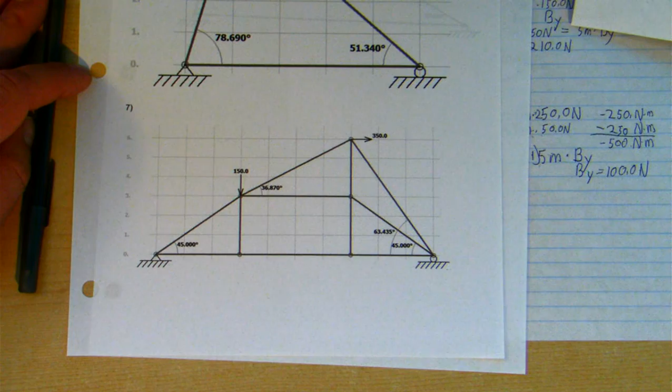All right, this is Monday, January 4th, 2021, Aerospace Engineering, a debrief on the assessment that was taken just before winter break, where one of the challenges was for students to work out the reaction forces for a given truss structure.

This particular problem looks very intimidating, and that was by design. There are some students who even made an attempt to work out what the tension and compression forces were for each member of this truss structure. But that's not what the objective was on this problem.

The objective was determine the reaction forces acting on this thing externally. So here's this complicated structure. I'm pushing down on it at this point with 150 newtons, we'll call it. I'm pushing to the right at this point with a force of 350 newtons.

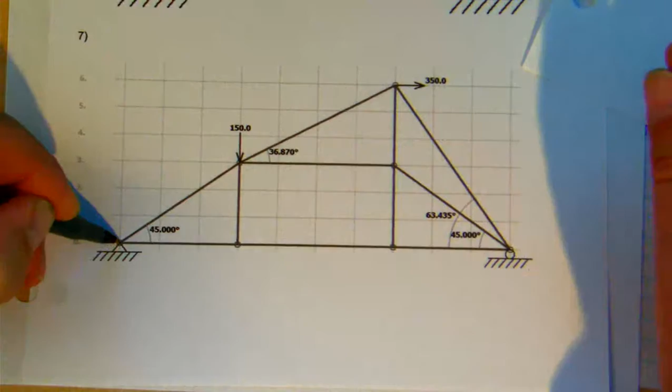And the question becomes, so what pushes and pulls do I need here at what we'll call point A, or over here, we'll call this point B, such that the sum of all the forces horizontally add up to zero, the sum of all the forces vertically add up to zero, and the sum of all the moments or twisting torques about any arbitrary axis of rotation also add up to zero.

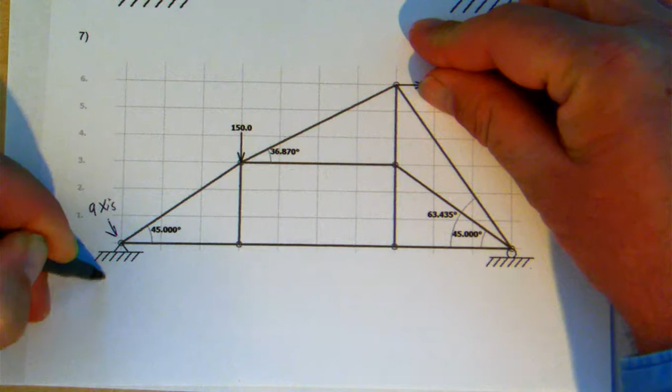Now I'm going to choose to put my axis of rotation on the left corner at point A, but that is an arbitrary choice. You can put the axis of rotation anywhere that's convenient for you. Here we go.

This 150 Newton force is pushing the structure downward. So there must be 150 newtons upward force going on between point A and point B.

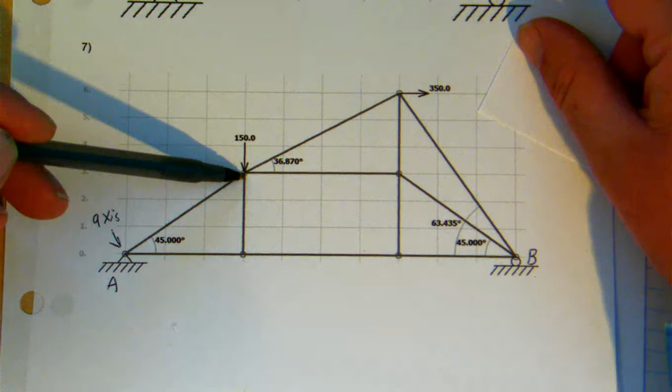But I'm not going to start by doing that. I'm going to start by analyzing the moments, the torques, the twisting forces that are trying to rotate this thing. So I'm interested in this 150 newtons is pushing down at a distance of 3 meters along its line of action from the axis of rotation.

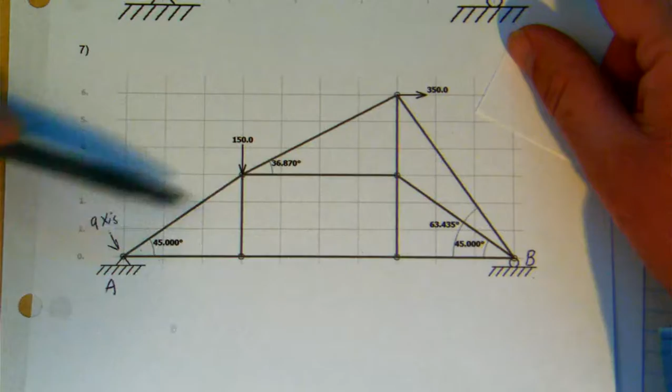So let me say that again, kind of. I chose my axis of rotation to be at point A. This 150 newtons is really, by Pythagorean's theorem, it's 3 squared plus 3 squared is 3 times the square root of 2 meters away from point A. You can do it that way. You could say R is 3 times the square root of 2 meters.

The direction from R to F is taken to be 0 degrees. On this printout, it says, oh, look, here's an angle of 36.870 degrees above the horizontal. That is not the angle that we would use for theta. We would say, I'm going to take the direction the pen is pointing, that's R, and I'm going to call it 0 degrees.

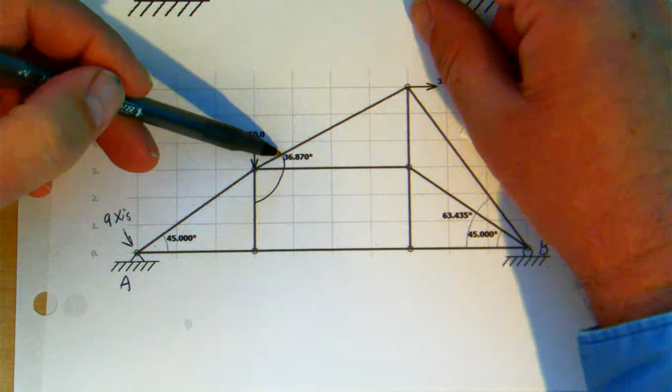The direction that F is pointing is vertically down. What is the angle between the direction of the pen and the direction of my finger? Well, first I rotate it 36.870 degrees, and then I rotate it an additional 90 degrees, and I get my answer. Oh, this angle is 126.870 degrees. And that's what I would have to type into my calculator, right?

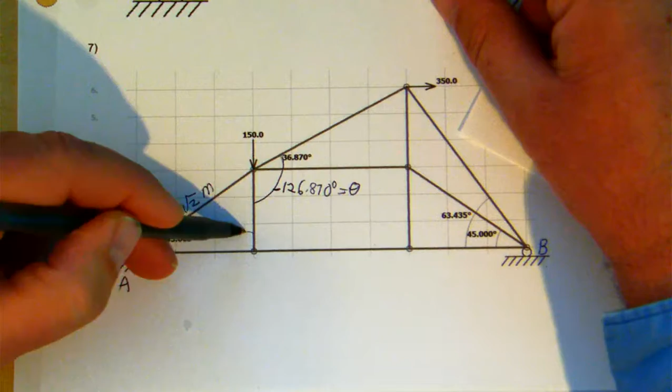Let's see, 36 plus 90 is 126. 126.870 degrees. And in the negative direction, if I use R is equal to 3 times the square root of 2 meters by Pythagorean's theorem, and I use negative 126.870 degrees, I will get the moment caused by this 150 Newton force applied at this distance at that angle.

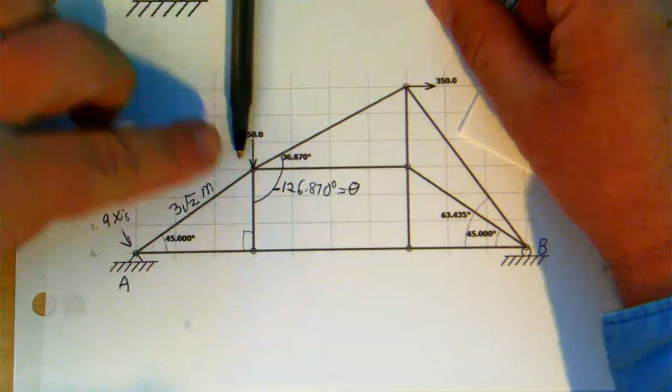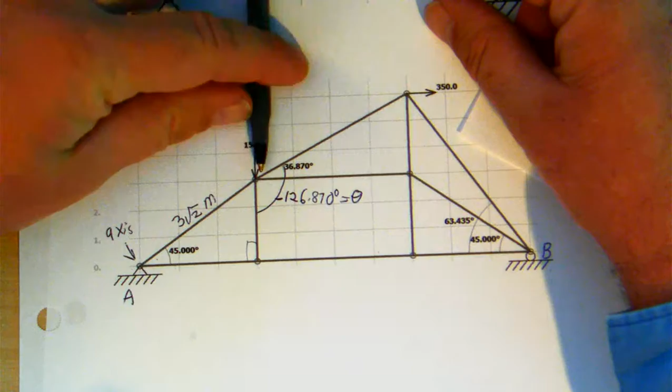The trick I've been sharing with you students is that I will get the same answer if I slide this force along its line of action. That means I can move it in the direction the arrow is pointing, and it won't make any difference in the answer. I can move it backwards from the direction the arrow is pointing, and it won't make any difference in the answer. As I move it backwards, r becomes greater. The angle also changes, and their product, the sine of this angle and r, will work out to the same product.

What I'm going to choose to do is to slide the force forward until the direction from r to f becomes a convenient negative 90 degrees. That means F is right here. Instead of being up here at 3 radical 2 meters away from A, the distance has decreased to where it's just 3 meters away from A.

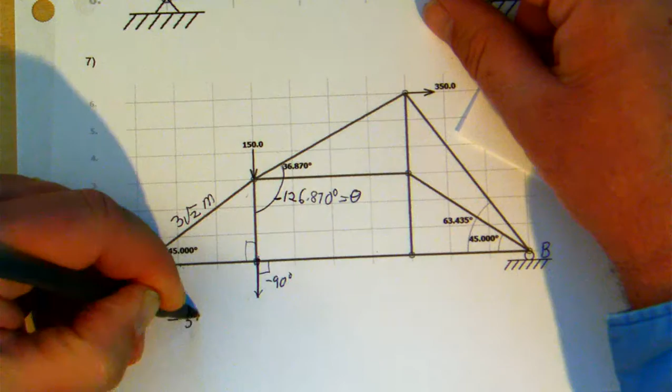The angle is negative 90 degrees. Sine of negative 90 degrees is negative 1. So this moment becomes negative 3 times 150 Newton meters.

Newton meters. That is the moment caused by this one force. There is a second force also trying to rotate this thing clockwise.

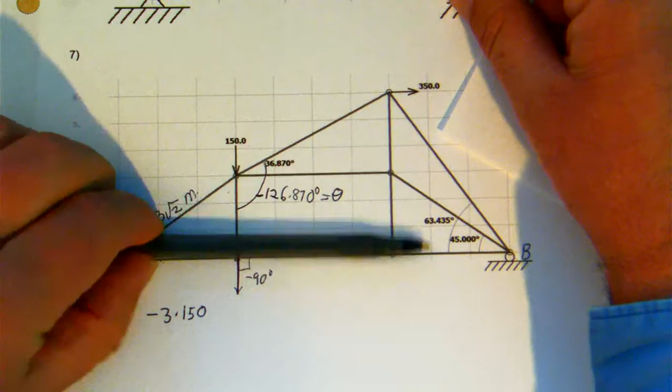Now, if this arrow were pointing to the left instead of pointing to the right, then you have a more interesting problem where this force is trying to make it rotate clockwise, while that force is still trying to make it rotate counterclockwise. Okay, look at that visual, great.

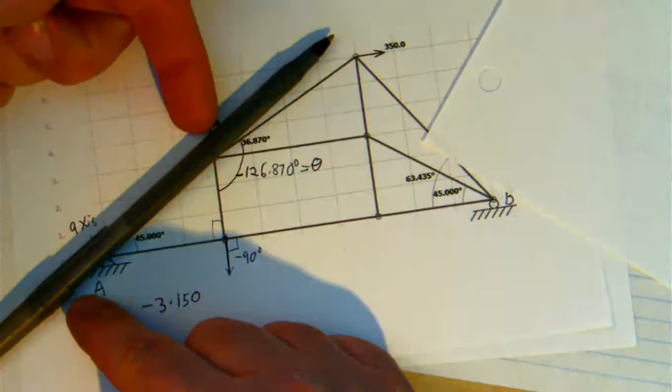All right, I'm pushing down, it's trying to rotate it clockwise. This one, as written, is also making it rotate clockwise. Okay, so it's making it rotate clockwise.

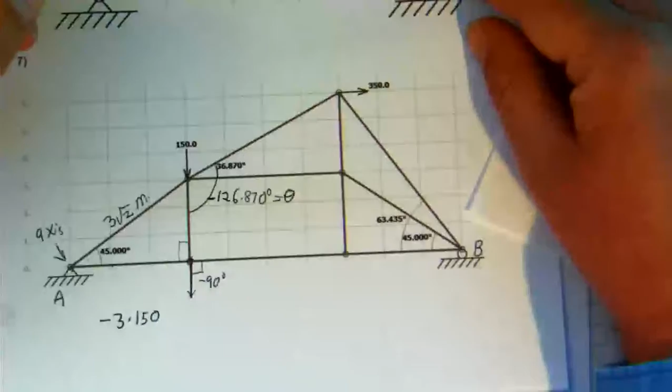Great. Well, I'm going to slide it along its line of action. Make my life easier. Because I can't just add this distance to that distance.

By the way, I see I used the wrong angle here, and not one of you students corrected me on it.

For this situation, I should have used a 135 degree angle as the angle between R and F.

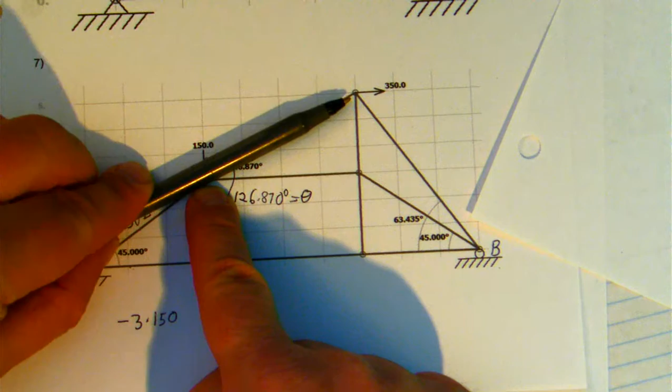Okay, why is that? Because it changes direction here a little bit. It starts off at a 45 degree angle, and that's the one I should have been using. Later on, the angle decreased to 36.870 degrees, but I don't care.

So back here, this was incorrect. The value I should have used was negative 135 degrees.

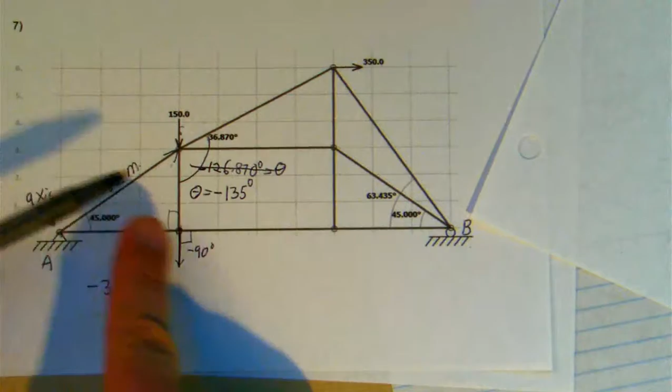And my claim is the sine of negative 135 degrees times 3 times the square root of 2 is, believe it or not, equal to 3 times the sine of negative 90 degrees. You can check that on your calculator.

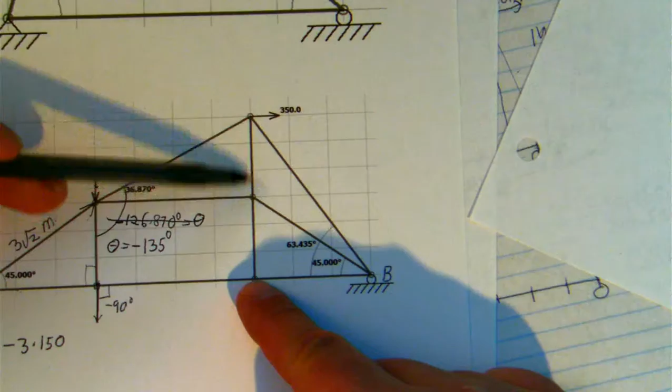All right. Anyways, if I wanted to get the value of R from A to this point up here, I should use the graph paper and say, look, this is 1, 2, 3, 4, 5, 6, 7 units to the right, 1, 2, 3, 4, 5, 6 meters up. Use Pythagorean's theorem for this right triangle.

Don't use this angle because it's wrong. Don't use that angle because it's wrong. If you do it, it'll work out.

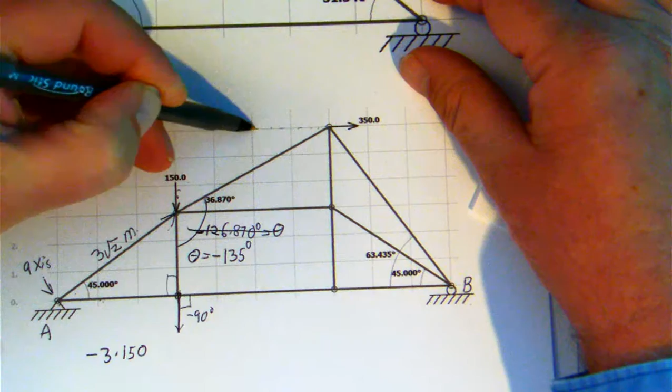I'm going to use my trick of sliding the force along the line of action. In this case, I'm going to back it up. I'm going to move that 350 newtons until it is directly above point A. So here it is. I've slid this force until it is perpendicular to R.

Here's my new R. It is 5 meters. My force is 350 newtons. The angle is negative 90 degrees. The sine of negative 90 degrees is negative 1. So this becomes negative 5 meters times 350 newtons.

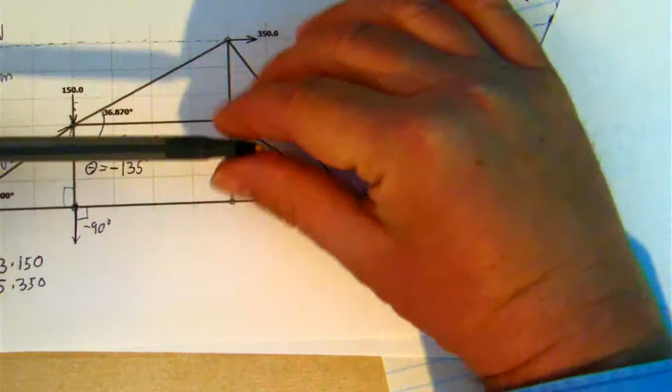These two moments are both rotating this complicated truss clockwise. The only way I can stop it from rotating clockwise is at point B, I have to push up with the correct amount of force to cancel these moments.

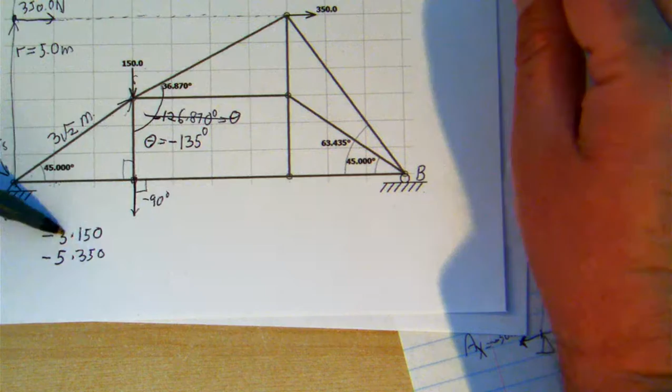Okay? I don't care about the forces. I care about the moments, which is the product of R and F. B is located 1, 2, 3, 4, 5, 6, 7, 8, 9, 10 meters to the right.

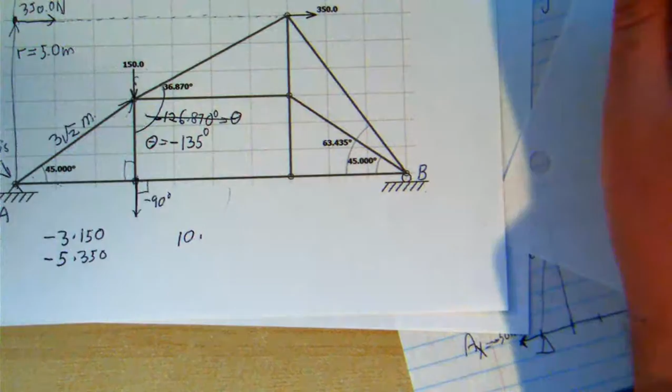The angle from R to F is going to be positive 90 degrees. So that makes it, of course, a plus sign. Sine of 90 degrees is 1. Times the reaction force at B in the vertical direction.

These two negative moments added to this one positive moment have to all add up to 0.

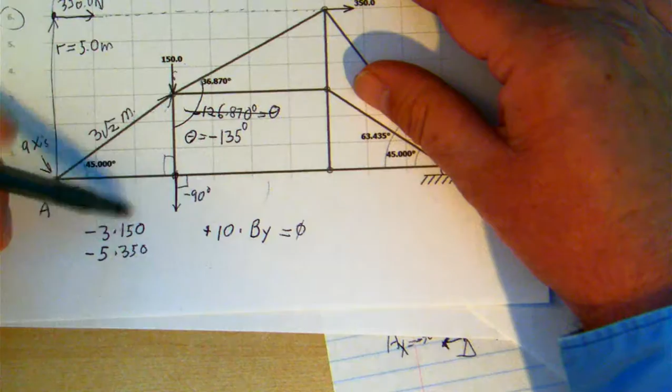So this is where I would pull out a calculator and I would say, what is, well, I guess you could do the first one in your head. What is 3 times 150? And I get negative 450.

What is 5 times 350? And no, I already can't do that one mentally anymore. It's 1750. And why is my phone? Oh, okay.

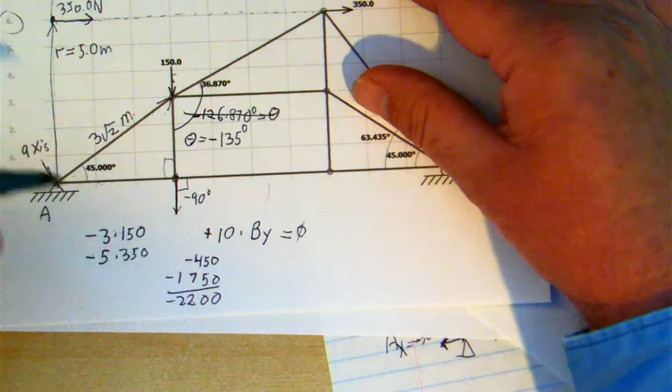So I have a total of negative 2200 Newton meters. Divide that by 10, and I get the reaction force at B is 220 newtons.

Let's go to the answer key because I'm worried about that.

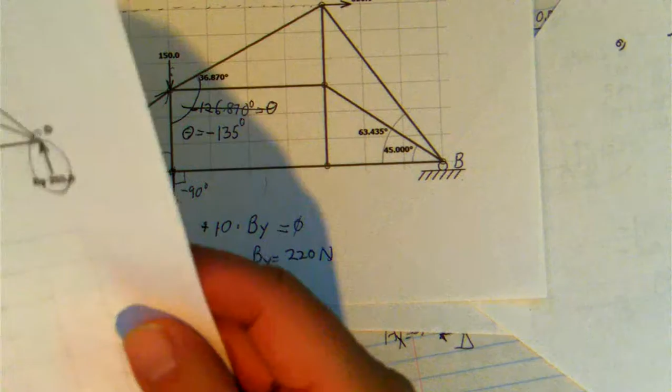I have a wrong answer. Kids, where'd I go wrong?

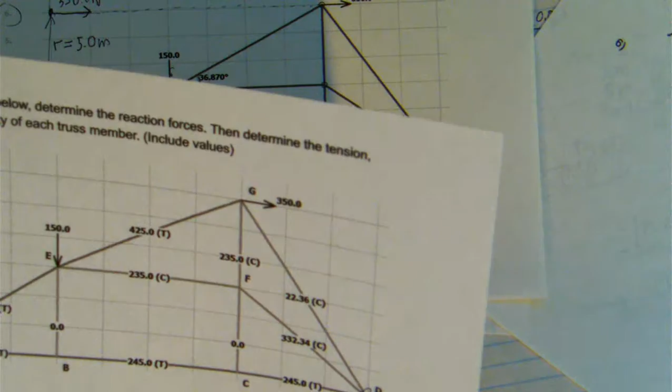Wow, science department has got a lot to say. Let me silence my phone.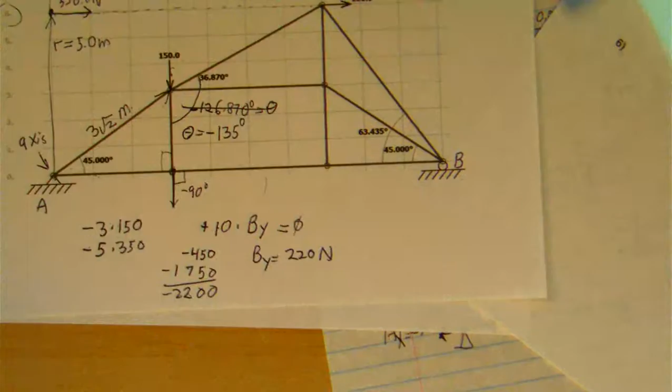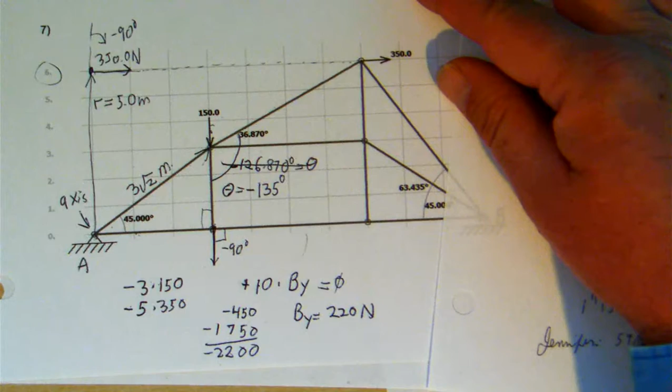Kids, where'd I go wrong? Did I type the wrong number into my calculator? I have 3 times 150 is 450. And counting 1 through 7... oh, here's my mistake. No, that's not my mistake. I'm sorry, 5 times 350 is 1750. Add the two together, I get 2200.

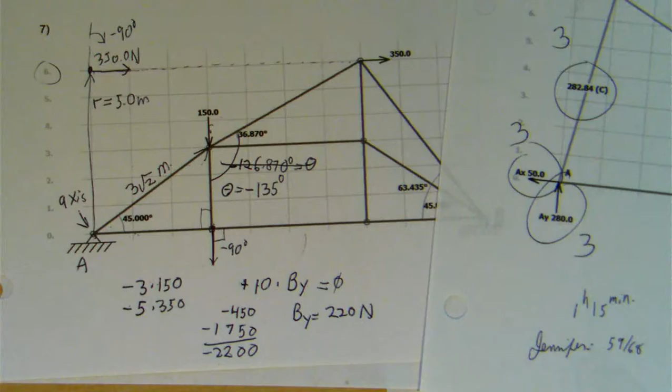Let's see, is someone going to help me? Was that a comment from somebody that I missed? Someone made a comment: isn't it 6 instead of 5? Maybe. Sure is, that's 5, that's 6. There's my mistake.

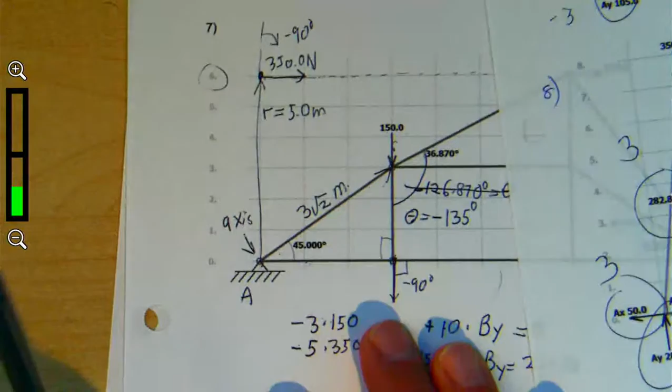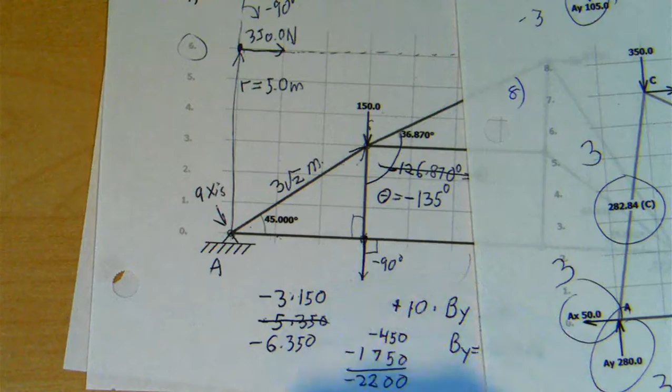Oh well, aren't you glad I didn't design the bridge that your mother has to drive over to get to any place these days? So the correction is this is negative 6 times 350, and yes, that makes it match the answer key now.

So let's see, 6 times 350 is 2,100. Add to that 450, you get 2,550, which you can't quite see. Divide that by 10, and you get 255 newtons. Thank you, Savina, I should give you extra credit.

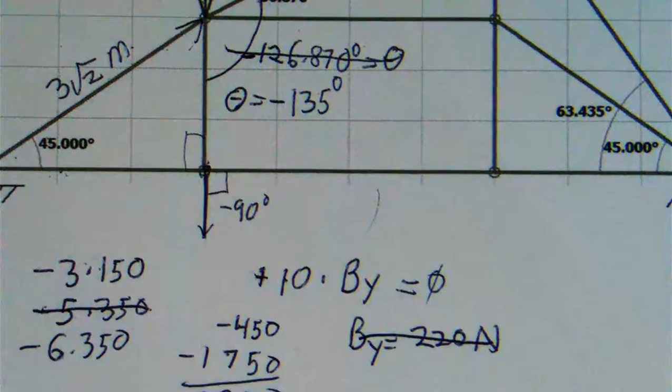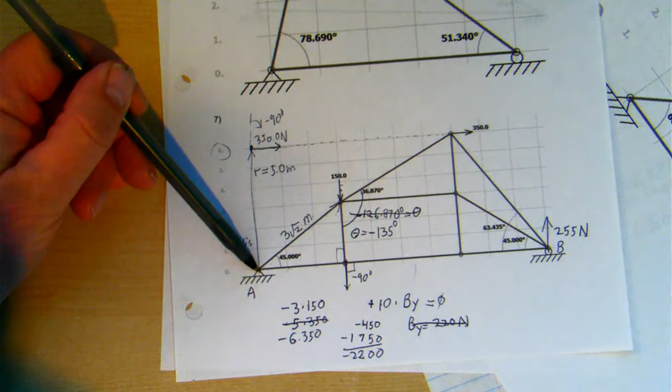Yeah, sure should. Okay, there, I finally have one piece done correctly. There are no horizontal forces at B because it's a roller -- it would roll if you applied a force. So everything else now has to be figured out at point A. There must be 350 newtons to the left at point A, because that's the only way to cancel the 350 Newton load to the right.

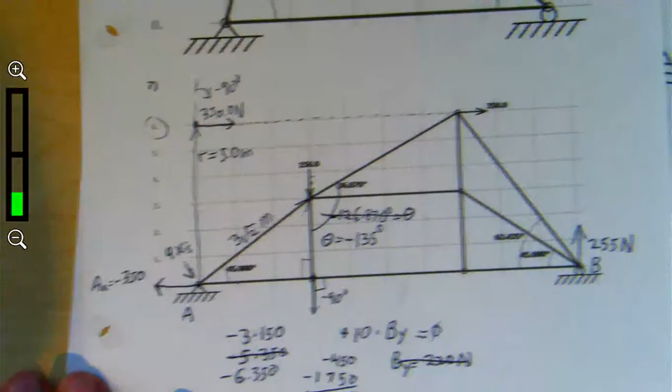Now, vertically, here's where some of you made mistakes -- not that I didn't make one myself just now. But vertically, 255 newtons pushing up at B, added to 150 newtons pushing down at A, and what's going on at A vertically, when added to these other two vertical forces, they have to all add up to 0.

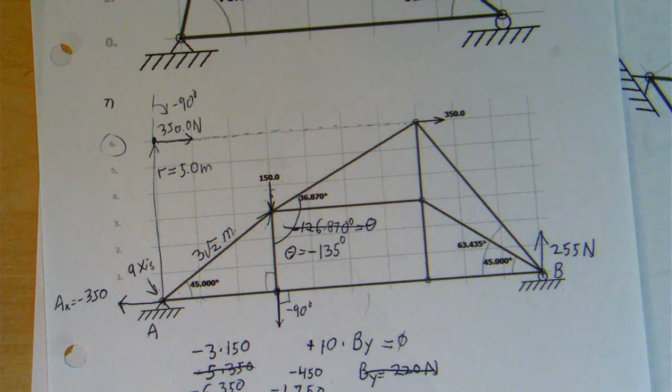So I could say -- how would I say this -- I could say 150 newtons pushing down minus 255 newtons pushing up means, crazy enough, I have to be pulling down at A, not pushing up, with a magnitude of 105 newtons. Most of you who made a mistake on this problem had this reaction force going up instead of going down.

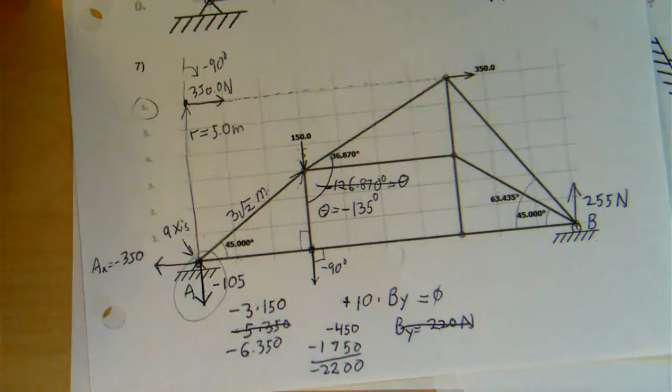Oh well, so I had to take points off. I believe I now have the correct answer key. Yeah, okay, I finally got this one right. Again, we don't care how complex this structure is on the inside. All we care about was the analysis of what are the reaction forces on the outside, at point A and at point B.

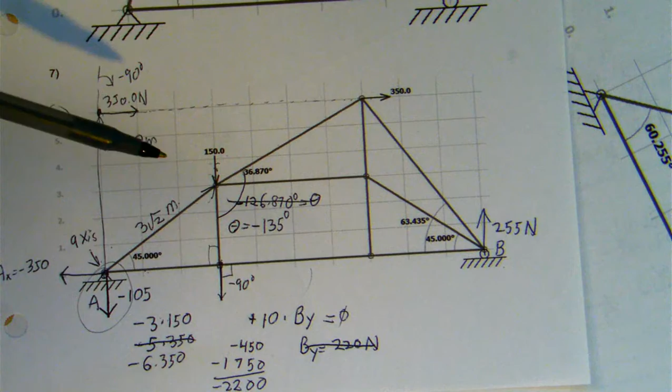It was the last problem where, look, see, I tried to make it kind of simple. And I said, okay, this time, go and do everything.

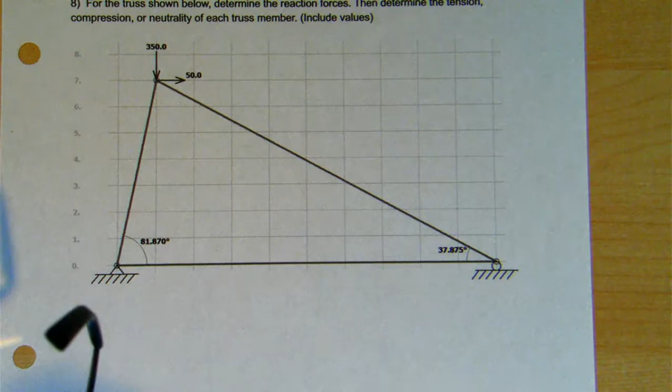Here we go, at kind of ludicrous speed. I have two reaction forces, or two loads going on. For one of them, 350 newtons, it's 1 meter from the axis of rotation after I slide it, and it's clockwise. So minus 350 Newton meters.

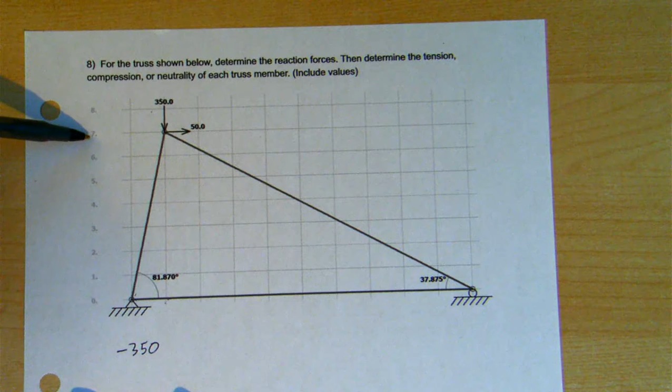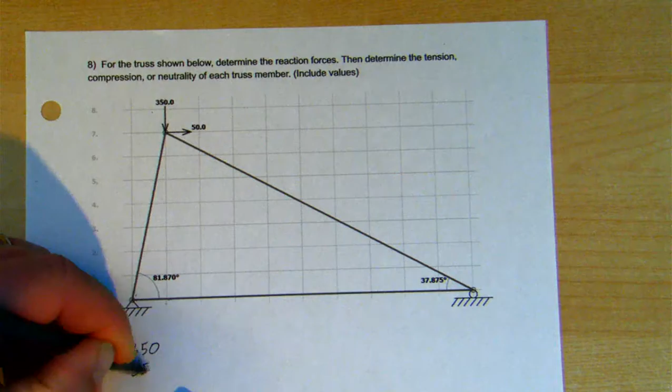The 50 Newton load is... I'm learning to pay attention, thank you Silvina... 7 meters away. So 7 times 50 is 350. It is also negative. So these two moments add up to negative 700 Newton meters.

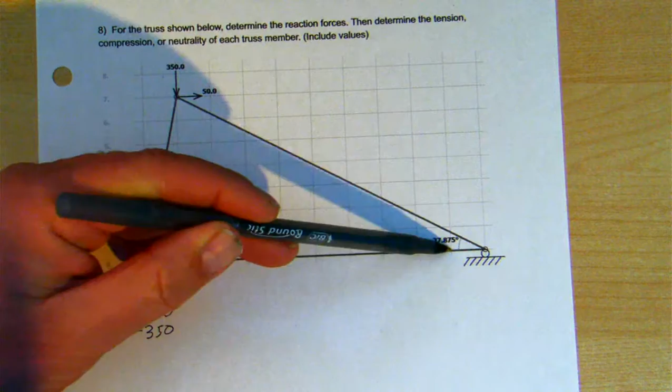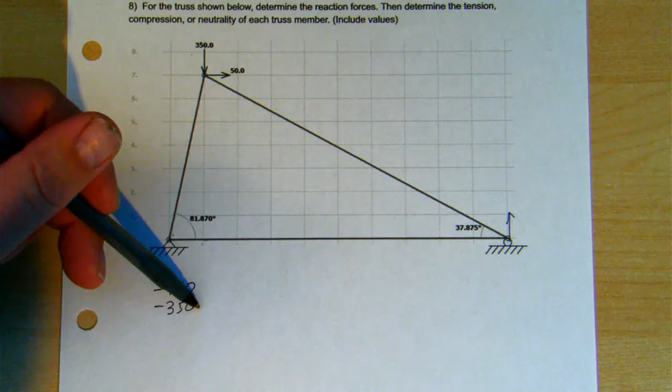Now, counting 10 meters to the right, the reaction force at B has to be pushing up with positive 700 Newton meters. 700 divided by 10 means 70 newtons pushing upward at point B.

And of course, I'm going to try to look up the answer key, see if I got it right. Oh my goodness, I did -- so far. At A, I have to be pulling to the left with 50 newtons.

The sum of all the forces vertically have to add up to 0. So I have to push up with 350 newtons and push up with 70 newtons. So if I go 350 minus 70, I get 280 newtons pushing up.

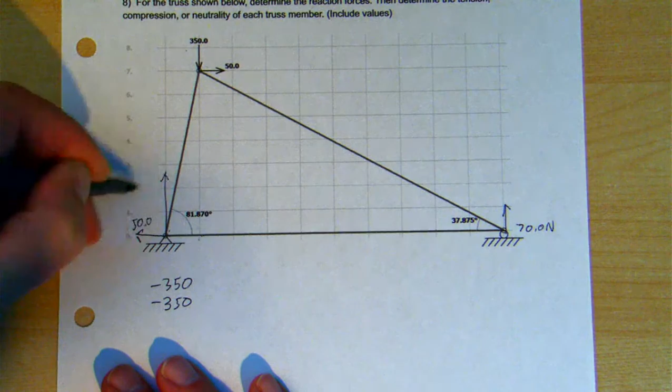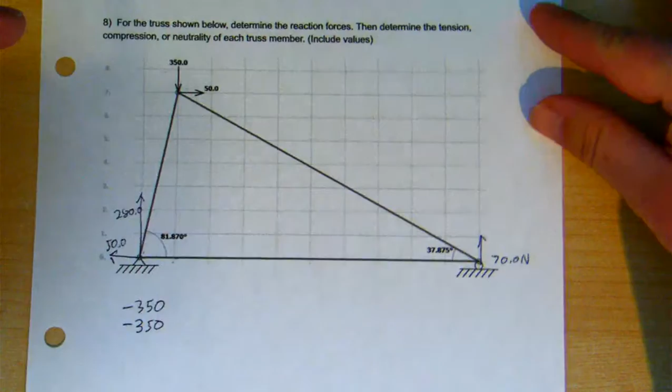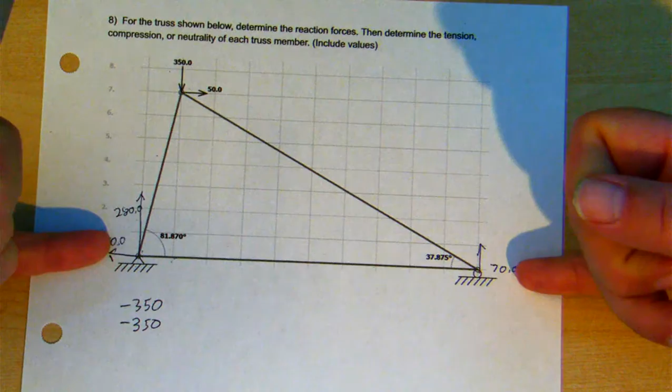Now, by the way, this must be done correctly first. It is impossible to get correct tensions or compressions for the interior members if the external reaction forces are not first done correctly. And so that was my strategy on this test -- I gave you several problems to get the reaction forces, and now this last problem says, great, do the reaction forces, and now let's go inside.

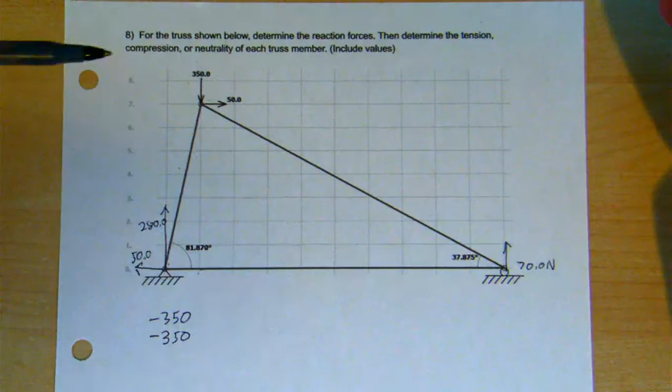I like to start over here at B. It just is easier for me mentally to figure out what's going on.

Mentally, I see I'm pushing up with 70 newtons at point B. Member AB can only pull or push horizontally.

Motion in one direction is independent of motion in a perpendicular direction. So the only way I can keep this roller from actually going up under the 70 newton vertical applied force of the ground is if member BC, I'll call this point C up here, and point B down here, and point A over there, is member BC must be pushing down with a vertical component of 70 newtons,

Canceling the ground pushing up with 70 newtons. Well, the side effect of BC pushing down with a vertical component of 70 newtons is that it's also pushing it to the right by some force.

The geometry is, these are similar triangles. So this triangle is 7 meters high, 9 meters wide. This right triangle here for member BC.

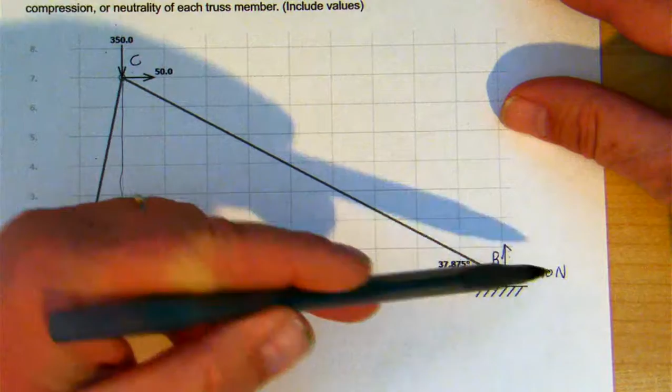So for every 70 newtons that it pushes down vertically, it's pushing to the right by 90 newtons. So it's pushing 70 newtons down and 90 newtons to the right, matching the geometry that says, oh, it's 7 meters up, 9 meters to the side.

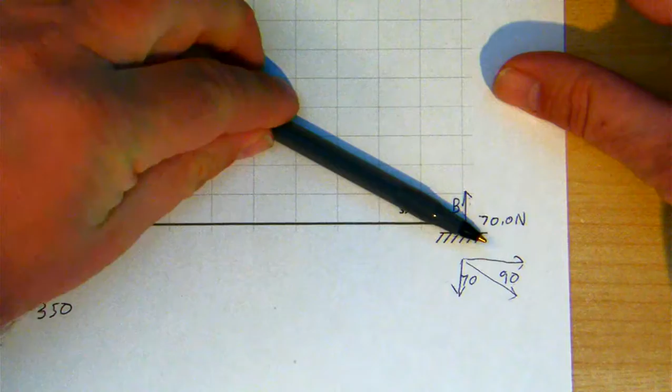Great, I can use Pythagorean's theorem to calculate the resultant hypotenuse. 70 squared plus 90 squared will be the force on this of member BC. And since it's pushing to the right, it is under compression. It is pushing apart. It's shoving.

So square root of 70 squared plus 90 squared is 114.0175425. Call it 114 newtons.

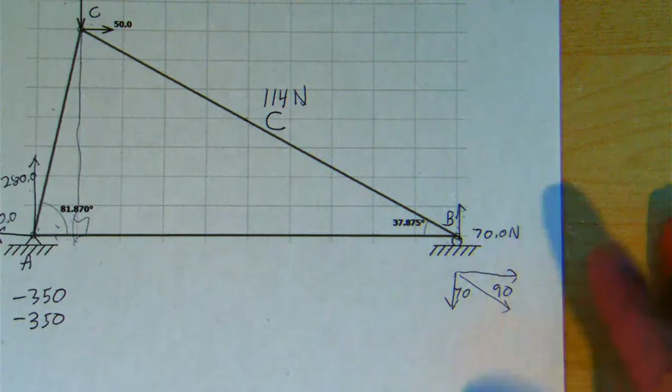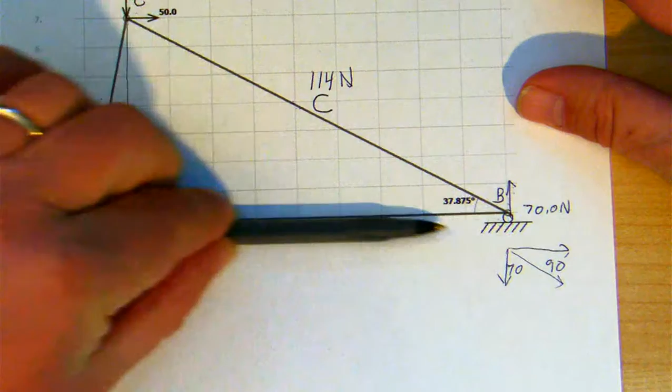Member AB, next one. Okay, I'm moving on. This one is easy. If BC is pushing B to the right by 90 newtons, then member AB must be pulling B to the left, so it's under tension, by 90 newtons.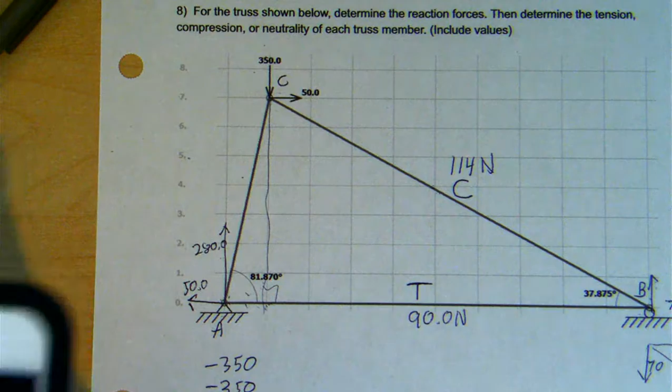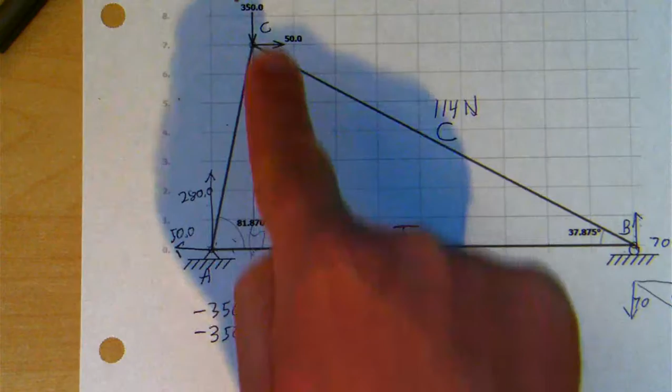Ta-da! For point A or for point C, you pick which one you want to do next. Oh gosh, I haven't picked on anyone all period. I've not heard one meaningful word out of any student. What if I just call on someone? Oh wow, Louisa. Should I try to analyze point A or point C next? Random choice.

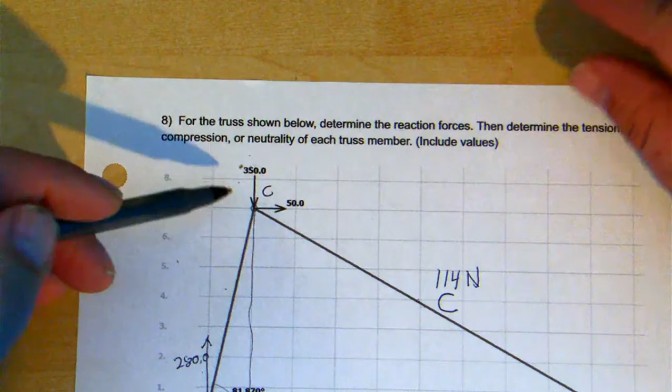Okay, I'm going to work on point C. If BC is pushing B 70 newtons down and at the same time 90 newtons to the right, that means

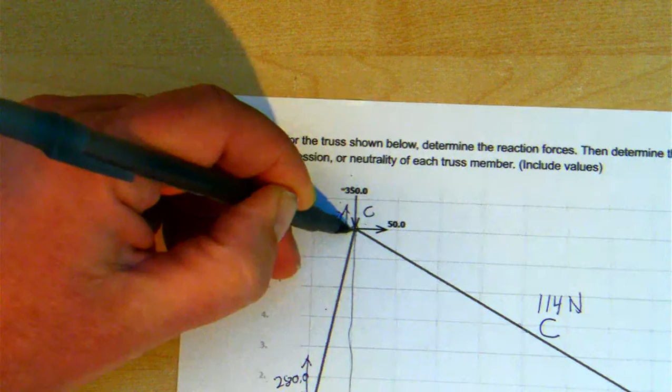the other end of it is pushing 70 newtons up and 90 newtons to the left. It's the opposite side of the same stick. So 70 newtons down and to the right on the B end is 70 newtons up and 90 newtons left on the C end of member BC.

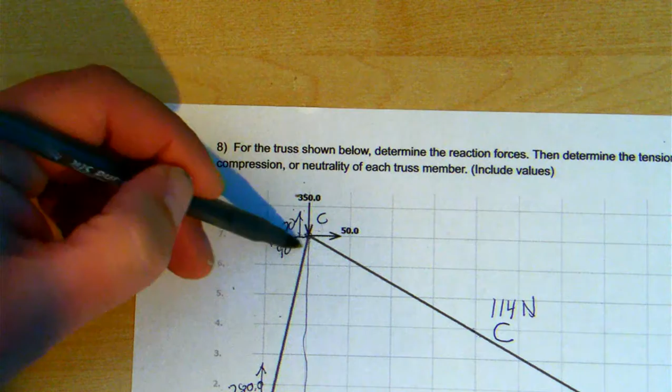Vertically, the load is pushing down on point C with 350 newtons, but member BC is pushing upward with 70 newtons vertically. Between these two upward and downward forces, that works out to be 280 newtons pushing down on point C. To cancel that, member AC must be pushing up with a force of 280 newtons.

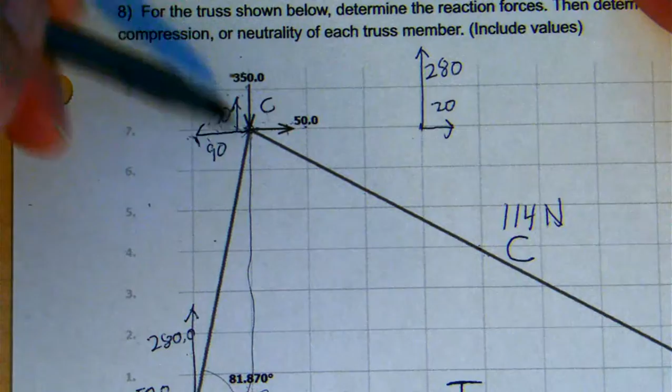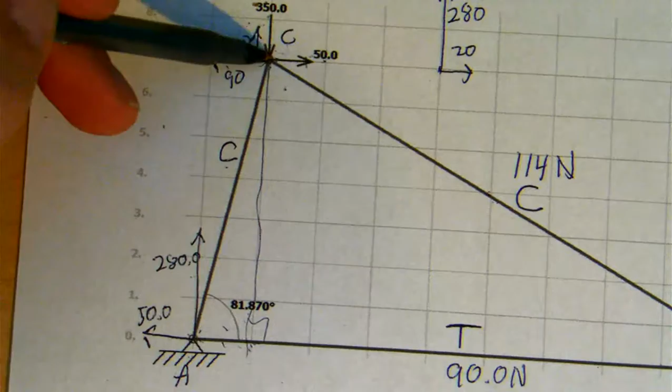Now I can figure out what member AC is doing. It is under compression because it's pushing apart A from C and C from A. It's pushing these two apart. So it's under compression.

Tension, oh man, here's the end of the period. Tension is when they pull together. All right, let me finish this off.

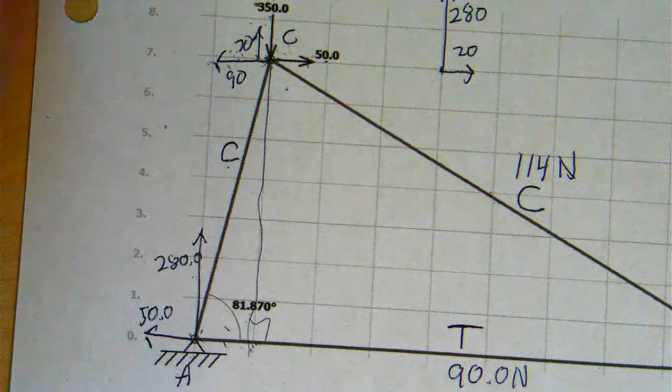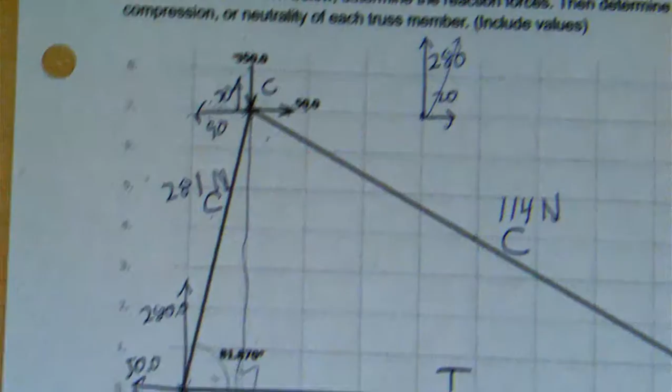I use my calculator to find the resultant of 280 and 20. The square root of 280 squared plus 20 squared is 280.7. I'll call it 281, I'm just going to round it off. And technically speaking, this completes our analysis.

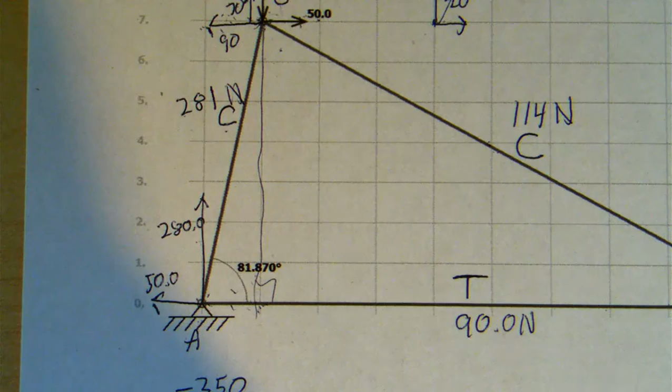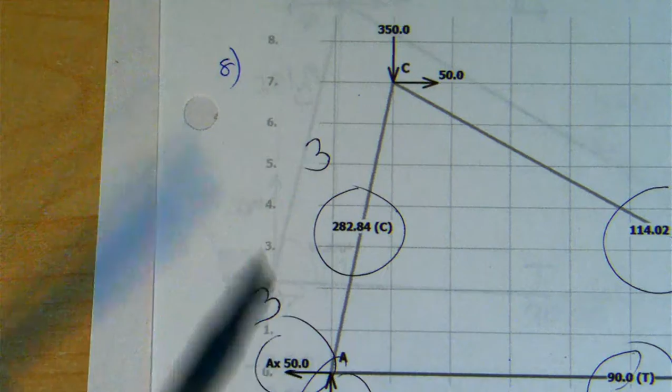I'm not sure if I need to bother doing A. I am going to dig up the answer key. And I see I have a rounding error. Here was the answer key. They call it 282 here. Maybe I typed the wrong number into my calculator. Who knows?